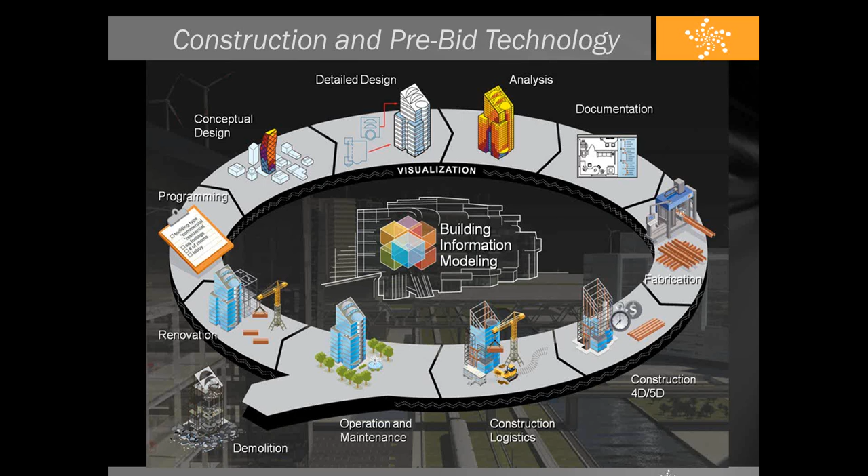Now, one of the things that is key to understand for this is the actual level of detail or level of development. Now, you have AIA E202, which is sort of like the protocol for these levels. So if you ever hear somebody saying, well, we're doing a model and it's 200 level of detail, this is essentially what this means.

Now, this is sort of broad strokes. It's not likely that you're going to have every single thing in an entire model all be the exact same level of detail. So your mechanical systems might be to 300, but the structure might be to 200. And the architecture might vary from 100 to 300 depending on what portions of the building you're working on or what portions of the building are very important or detailed.

And some of this might be informed also with, are you doing renderings and walkthroughs? So you might actually model certain things to a higher level of detail because it needs to look a certain way, not necessarily because of a construction benefit. So you'll be seeing a lot of things like this.

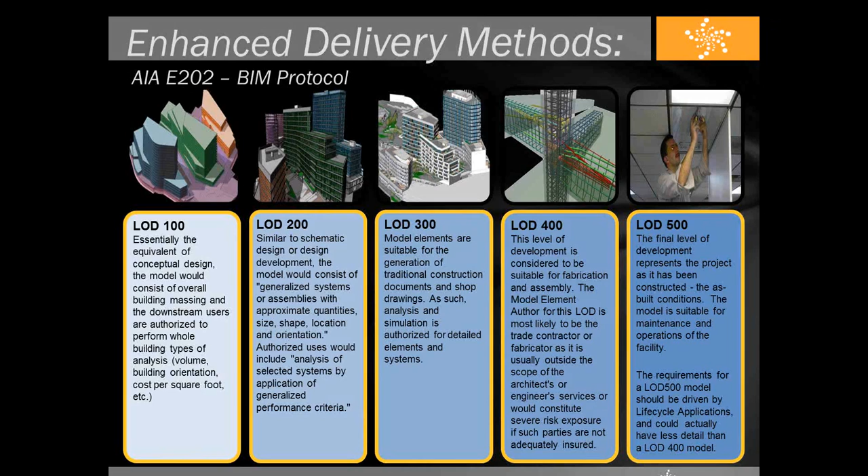Now, in terms of what benefits BIM has for the industry, the main one that everybody seems to be saying is their main benefit that they're getting out of this is visualization. And then below, that's marketing. So the benefit is taking your design and making them real from a standpoint of being able to show your design, whether it's selling a design or explaining it.

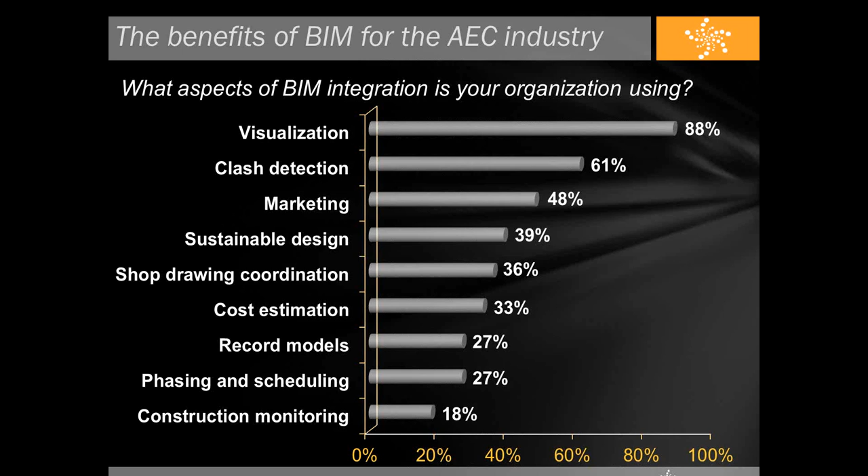Now, the second one down there is clash detection, and that's probably the biggest one from this portion. The problem is, if you look here and down the bottom, you've got construction monitoring, phasing, record models, cost estimating, shop drawing coordination. All of those are not anywhere near as utilized. Now, they're also further down the line. So what we're looking at doing is taking something that is, in all honesty, the biggest return on investment of BIM, but not everybody is actually taking advantage of it.

So the work that we're looking to go over now is focused specifically on that portion: the idea of making it real in the computer before it's real in the real world. If you find a problem in the computer, you can always delete it or move it. If there's a problem in the real world, yeah, maybe you can just fix the problem.

But the problem is maybe you have to order something new. That adds time. By the time the parts come in that you need, the people to install that might not be available. So one little mistake could sideline a whole project. Going through everything in the computer virtually for clash detection, for cost estimating, for actual project sequencing, those things are all very important. Even though they might add a little bit of time to your project or process, that's time and money well spent because it's going to pay dividends down the line.

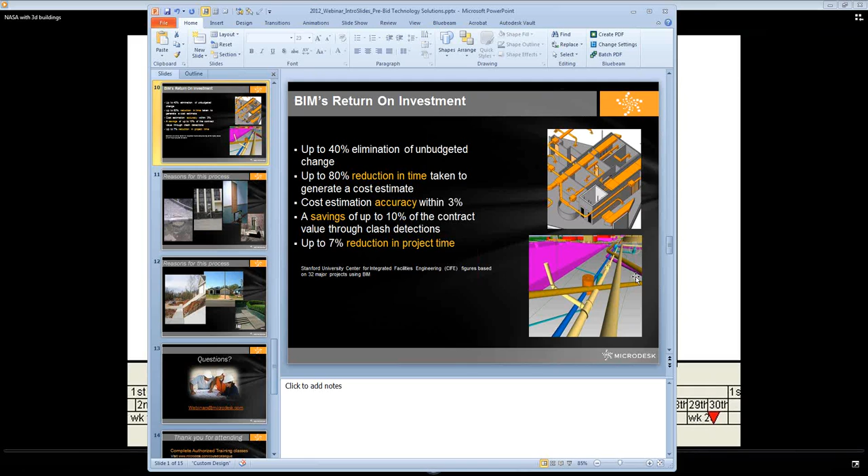Now I'm going to hop out of this and go to the actual software. So right now I'm in Revit 2013. One of the nice benefits of this is that it's Revit, not Revit Architecture, not Revit MEP, not Revit Structure, just Revit. Because I'm on the Building Design Suite, I have the tools for all three.

Some of the benefits of this: if I work for a construction firm, what kind of model can I expect to get from an architect or an engineer? Or can I even expect to get that model? Now if I'm drawing a wall in an architectural project, let's say it's brick on metal stud, I'll just draw this wall there.

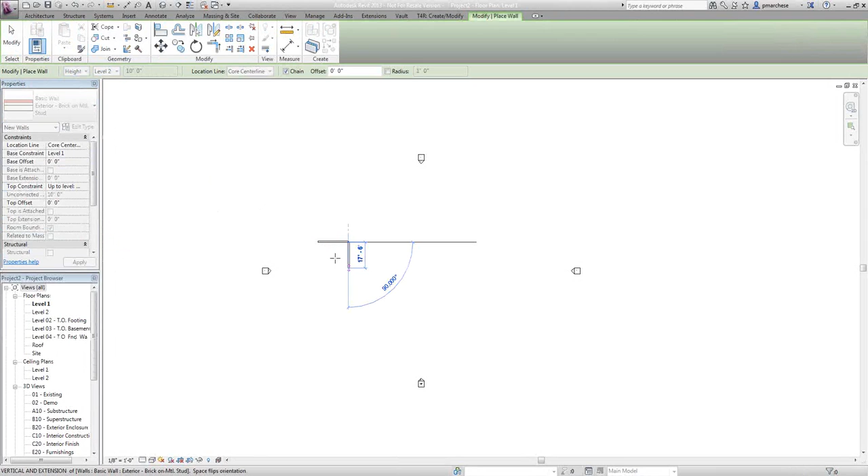Zoom in on it. It's going to look really simple, but I can always change the level of detail and actually see more information. Now, this is fine for construction documentation. The thing is, though, for actual construction sequencing, I might need a lot more information in this. I might need to modify certain things.

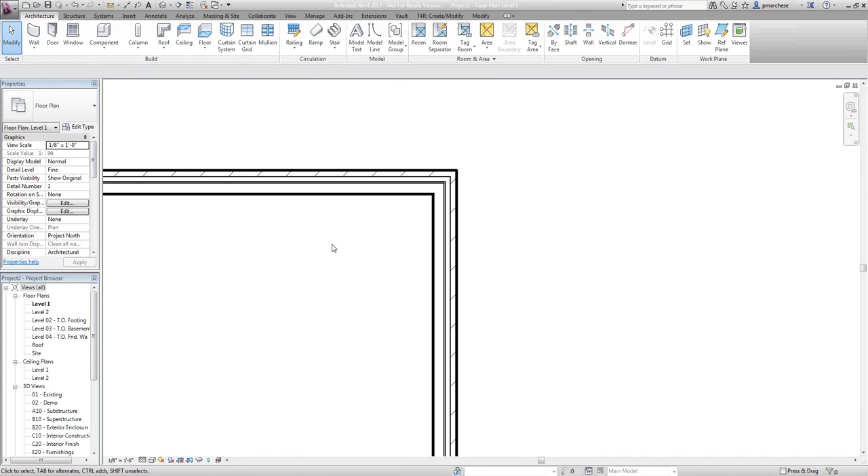There's actually tools built inside of Revit that have been there for a couple of releases now that are geared just towards that. If I click on this wall, what I can actually do is break this up into its component parts, meaning that I can now actually choose these individual pieces. So if I want to modify things here, I can change the actual layers of that wall's construction.

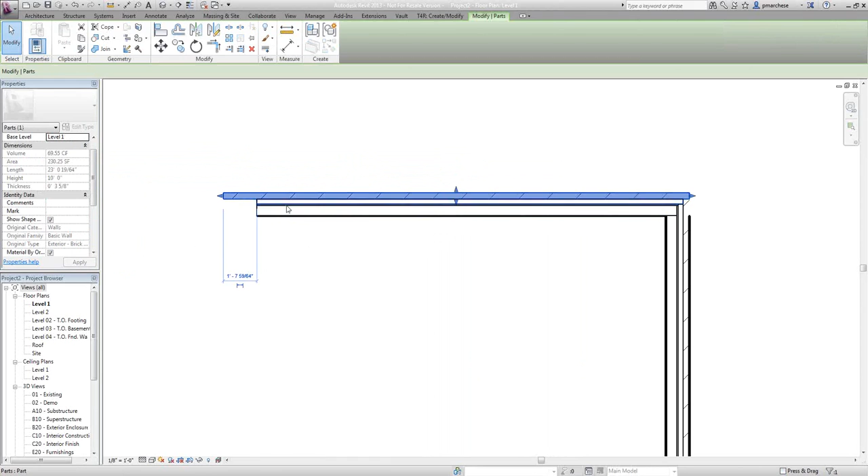I can say I want to phase different parts of this wall. So if I really want to have a full 4D model of every little piece of this, I can come in here and sequence, and say that rather than just being phase created and demoed, I want this to actually just be new and existing.

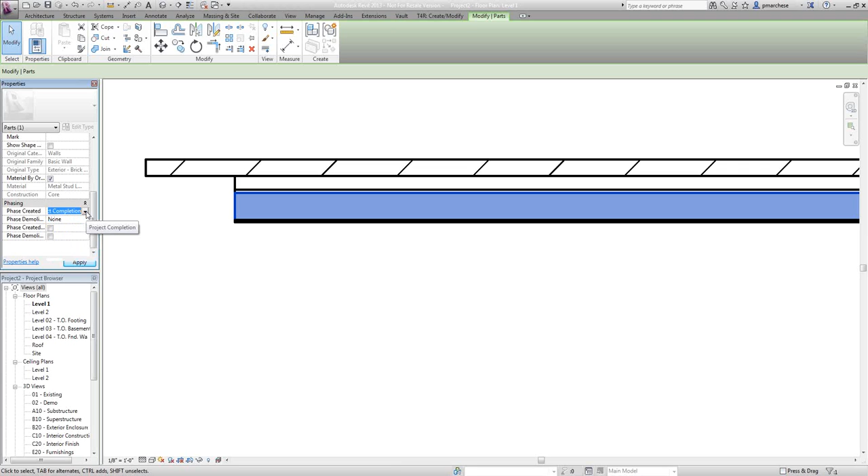I can say, okay, during this phase we're putting up the studs, and then I'm going to come in and put the gyp board up later, sheathing. So I can actually individually pick each layer of that wall to get down to the very details of this. A lot more information that I can modify, and it's still within the native Revit program.

Then I can always pick an existing object and add that data to this. I don't have to start off from scratch having it built that specific way. Another thing, let's say you have a really big floor. So come in here, actually create my floor boundary.

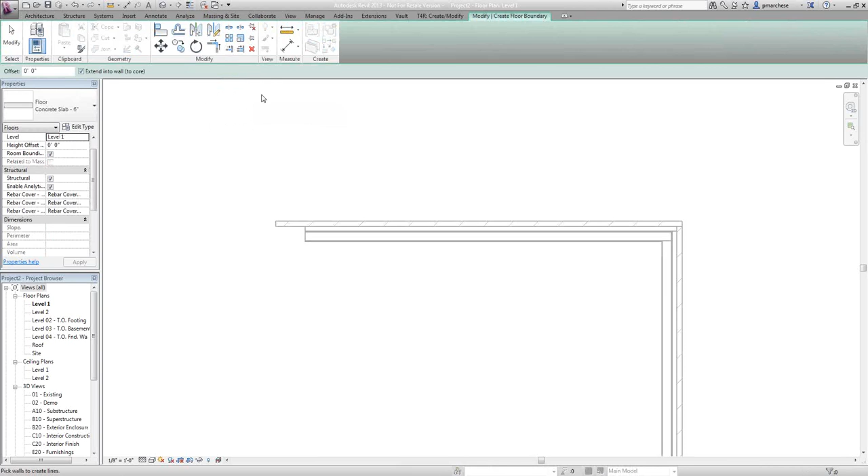Okay, come on. And of course my floor doesn't want to work today. Okay, what I can end up doing with this is actually modifying this to be the kind of floor that I want this to actually be. So I can actually split that object up using the parts command, just like I'd be able to split up this wall.

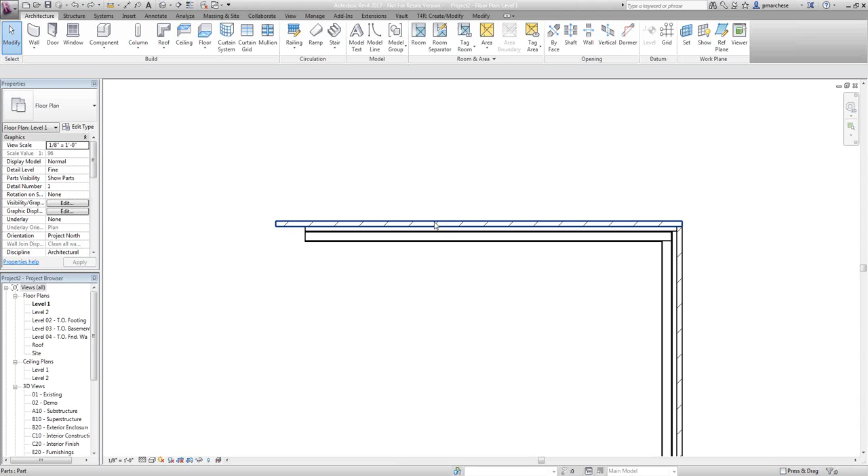So that enables me to take what I might have received from the architect as one huge floor. It's not going to be poured that way. I can actually split that up into the individual pieces so that it'll actually behave and be scheduled or quantified in the way that it actually would be laid out in the field.

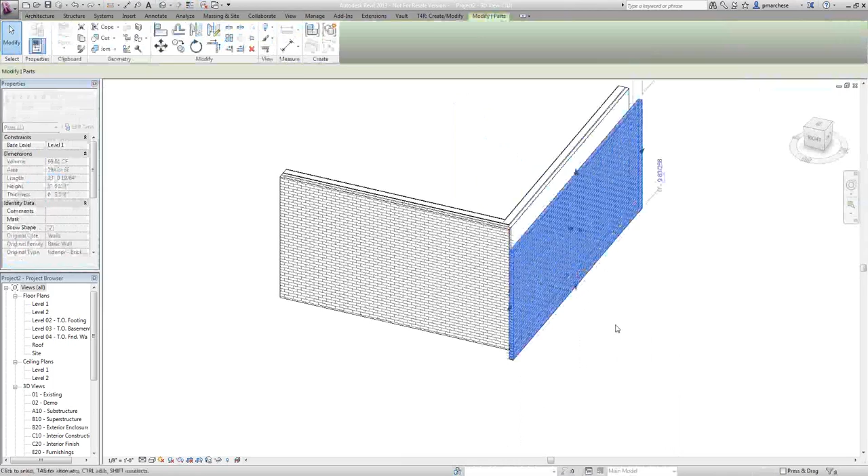So these things that I'm doing here, I actually have that individual control. I can modify these to be what I want them to actually be. I can pick on the different layers, show them as higher or lower. If I need to show a brick shelf but the initial design didn't have it, I can easily just come down there and move the brick shelf down. So I can actually schedule, quantify, and get all the information that I feel I need from my model.

Now for other things, let's say I have a structural column, and I want to say this one is concrete. That's going up.

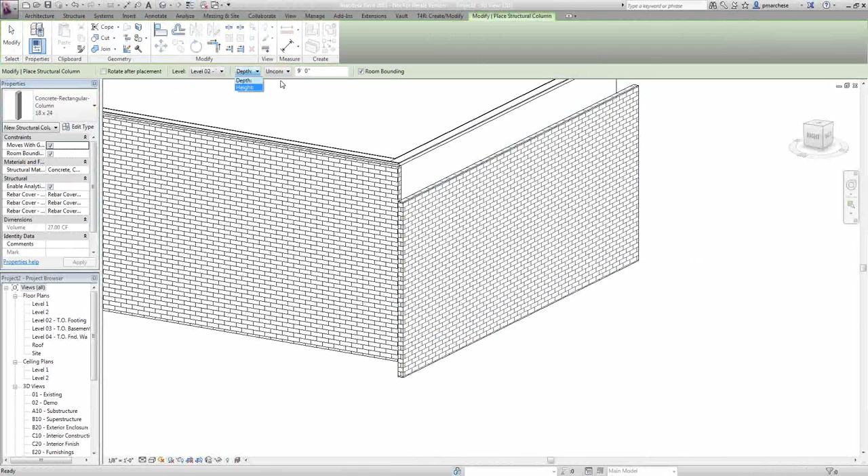Now, normally that might be all you need to do. Just show that column, and you're all set. Start that at 0. There we go.

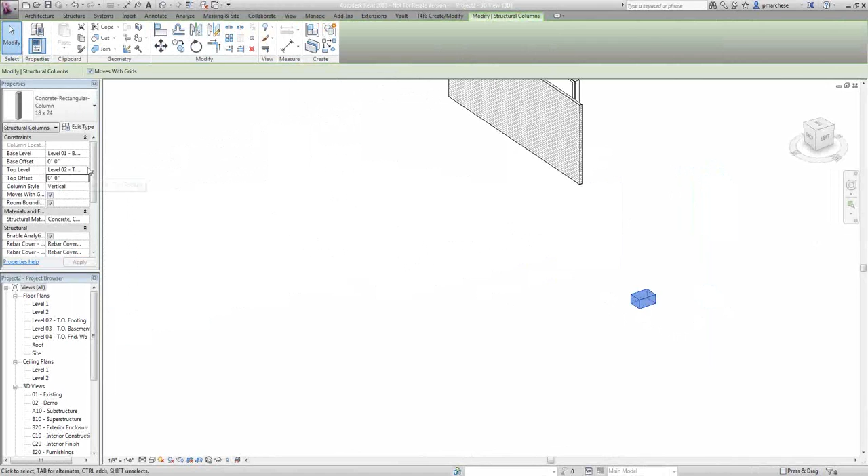Now, what happens if what I really want to do and show here is I'd like to actually see this column with the rebar inside of it. So if I'm running piping through this column, or running things near it, I want to see how much space I have around it.

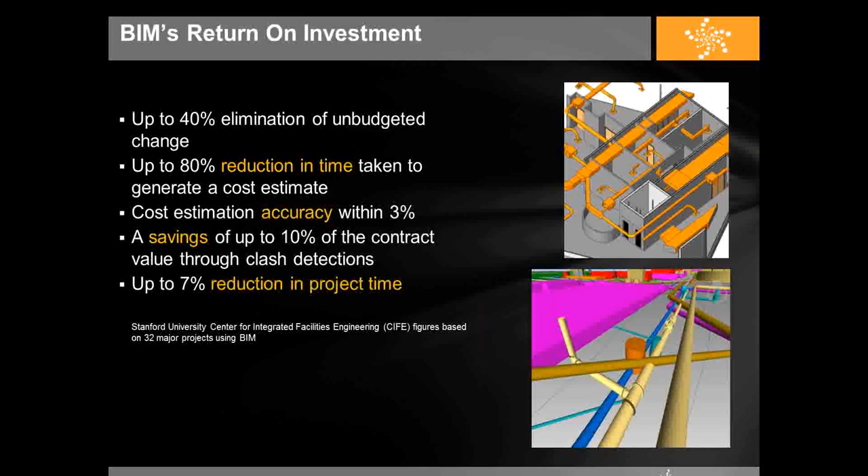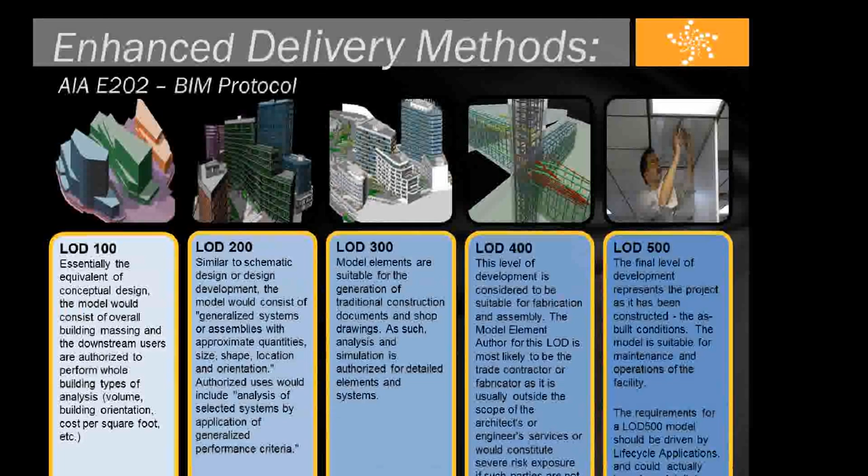So if I have that view from the PowerPoint before, if you have a situation like this where there's a lot of rebar going on, a lot of things happening within a very tight space, maybe they're running conduit through it. Maybe I actually have to figure out how am I going to get all that together.

What I can end up doing is modeling all of that rebar. Maybe not for the entire model, maybe again only for key locations where I have to work.

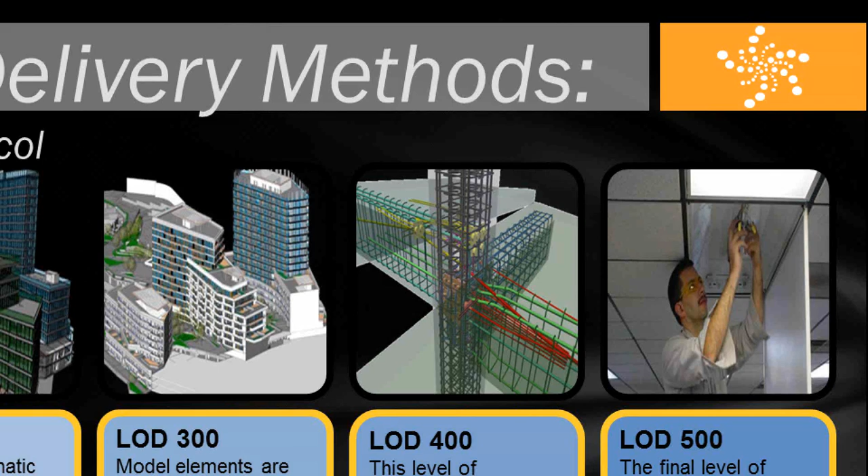And with the tools, it's actually quite easy. I can just select that, tell it that I want to put reinforcing in it. What this will end up doing is it'll give me an actual window with all my connections inside.

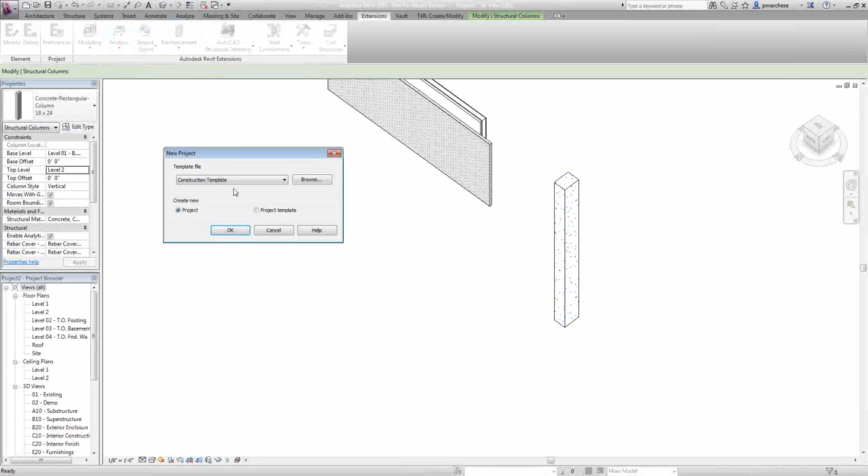So let me do this. Start off with my structural template instead. That'll give me that.

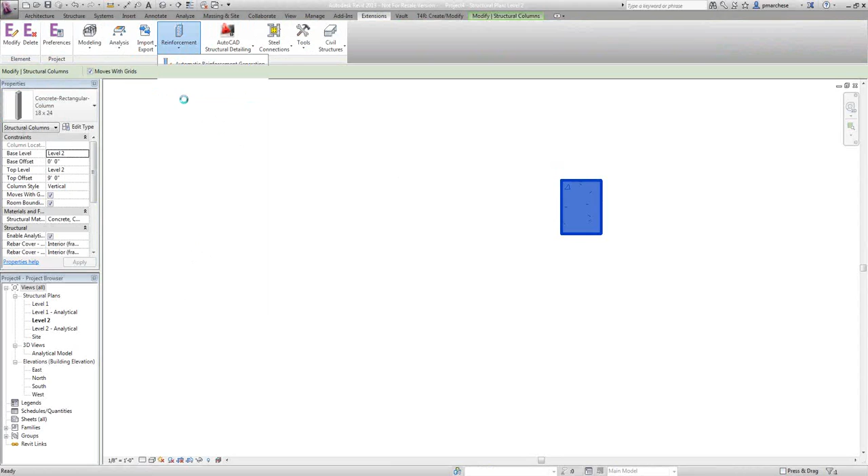So this will give me the tools where I can just select the object, fill in the blanks essentially, and this will actually lay out all of my rebar for me.

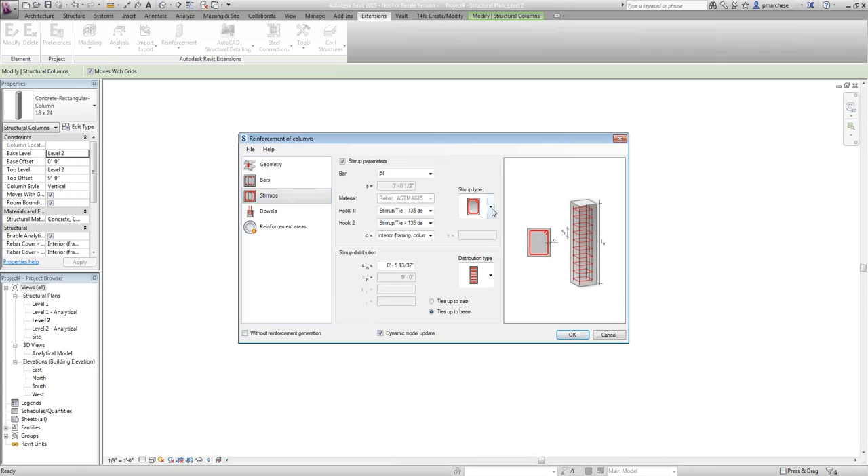So if I understand where my bars need to be, which size they should actually be, do I want to have hooks at the top, what should the stirrups look like, how they're going to be distributed. Maybe I want them to be a little bit heavier on the bottom, and should they maybe have dowels at the top or the bottom? What should this look like?

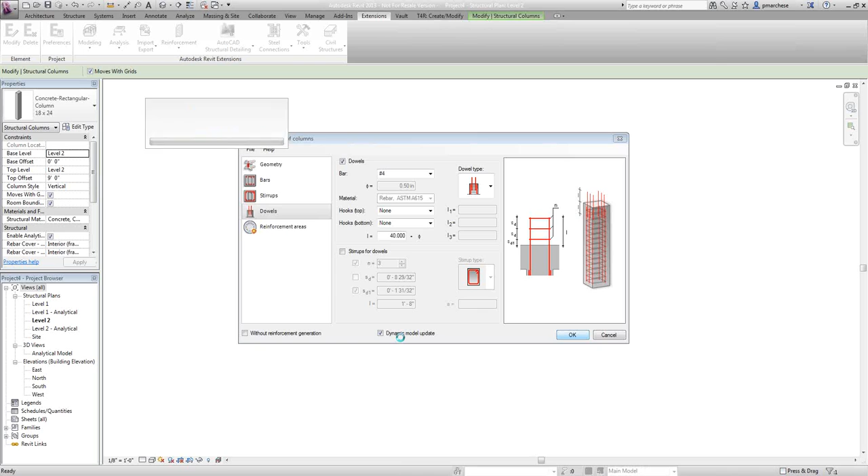So basically I'm just going through there, telling it that I want them, and now in that location, whichever pieces I've selected, I'll actually have all my rebar made. And I can do this for more than just columns at a time. I can actually set things up so this will be automatic for much of my model.

There we go. So you can see my rebar right in there.

Now this is something that I can use inside of Revit, but I can also take this to the next step, which would be Navisworks. So if I needed to do clash detection between multiple models, or to see really how much space I have in here, or if I have multiple models coming together, is there actually enough space for things to fit without causing issues?

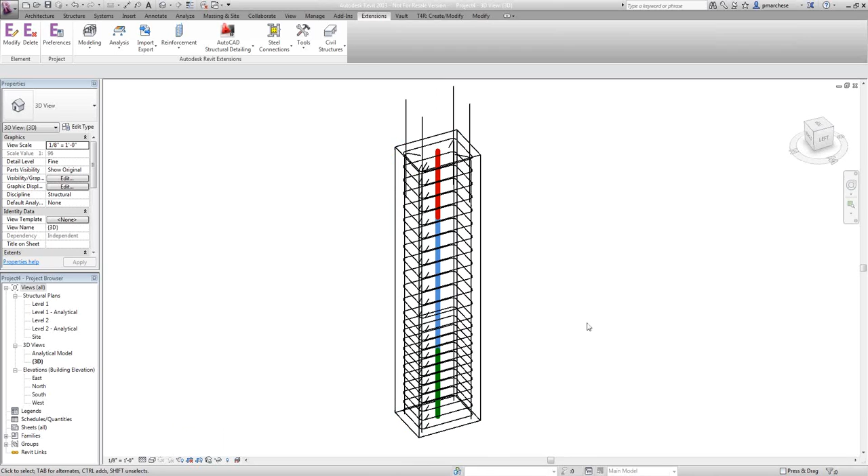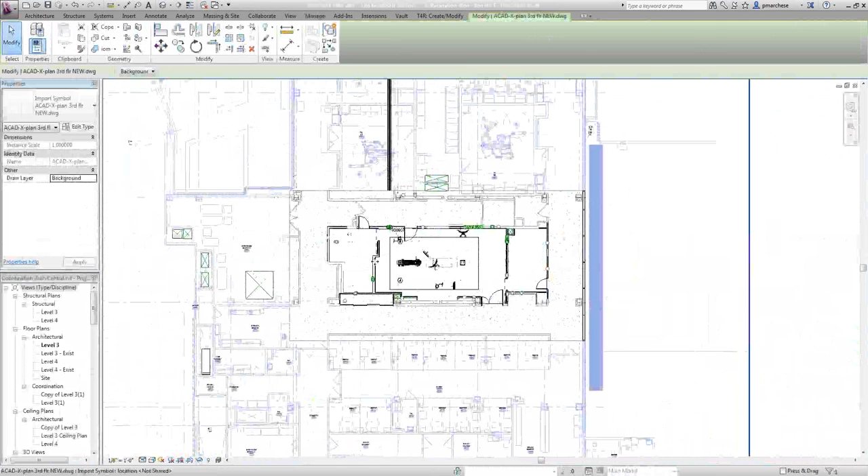Now, this is relatively simple. That wall that I did before, again, still relatively simple. For other projects, when you have a lot of things coming together in a very tight space, maybe you started the project off with nothing more than the big CAD file, but the project is fast-tracked, and you really need to know exactly what's happening. Well, what can be done is only in the specific locations that are important, we can actually run through and modify and model what's needed.

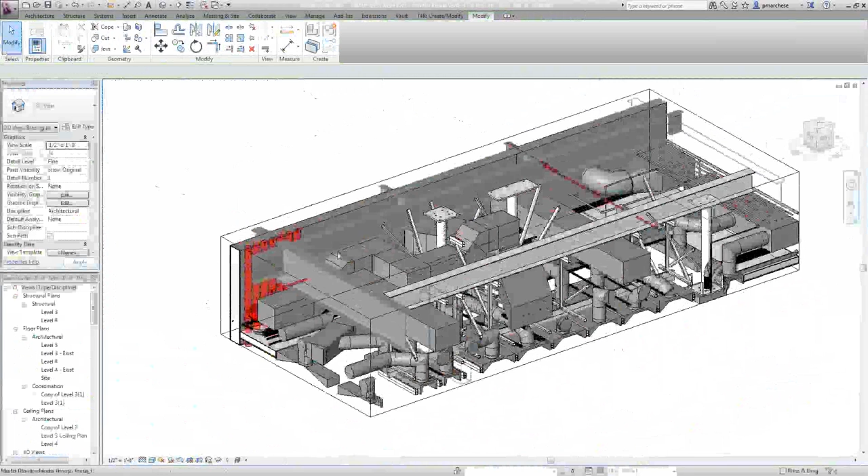So in this case, what we have is an MRI room with just about every single thing modeled at a very high level of detail. Existing content to be demoed, all the actual structural pieces to a much higher level of detail than you would typically see for construction documentation. But in the case of this project, it was very necessary to ensure that every little thing would fit in a very tight space.

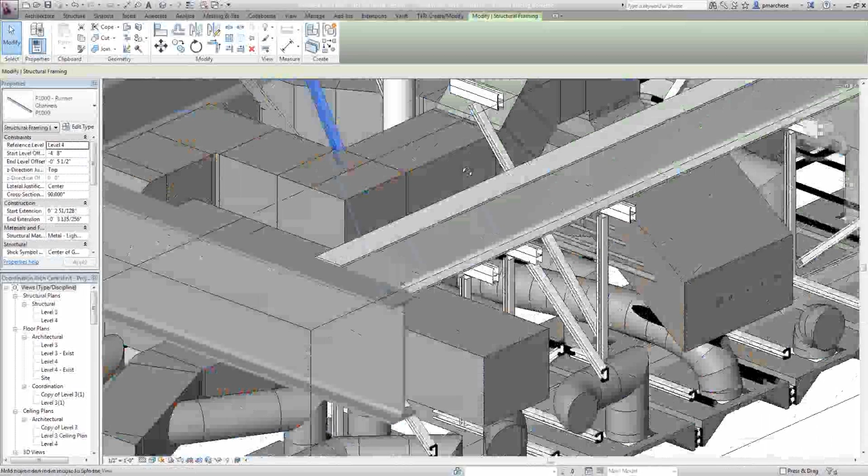So we knew all of the information on what the structure would look like, where it would go. And in some cases, you can see where there are issues with things like piping and conduit going into the ductwork where it had been.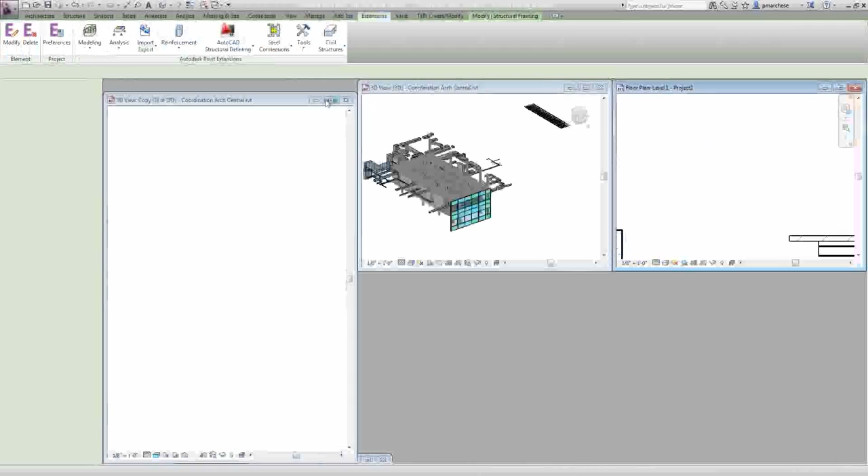But by modeling everything here at a very high level of detail, and being able to see and coordinate things based on the kinds of systems that they are, this can easily be taken to the next level, which would be our clash detection and more of the construction modeling. So in this case, all this information here is going to be readily leaned on and utilized.

So I would take this and bring that to Navisworks. Now, in Navisworks you do not actually model anything. You bring in the models from elsewhere, but they can be from just about any place. It doesn't have to be AutoCAD, Revit, SketchUp. It can be anything. But I can bring this in here.

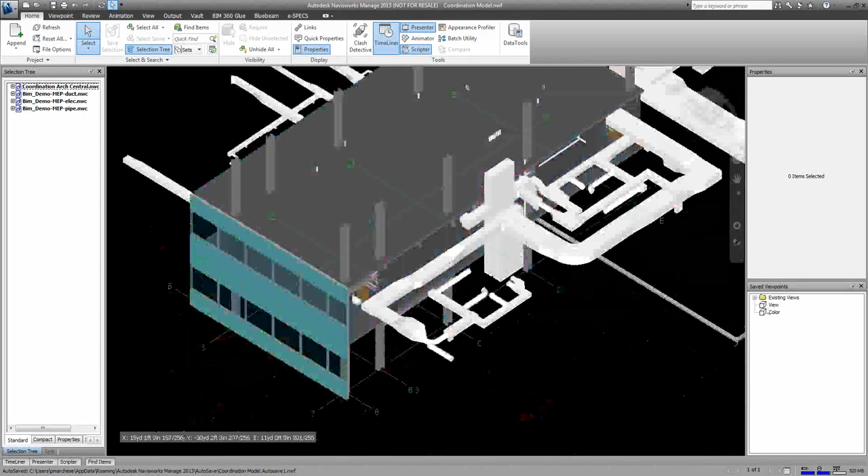And as you can see now in the newer releases, I can actually see my structural grids, so I know where it is that I'm actually looking within the model space. And I can set this up to actually show me all my systems.

So right now I'm actually highlighting my architectural by making that transparent. I'm showing all my ductwork as sort of a cyan. My electric is green, all my conduit there. And then I have all my piping set up as an orange.

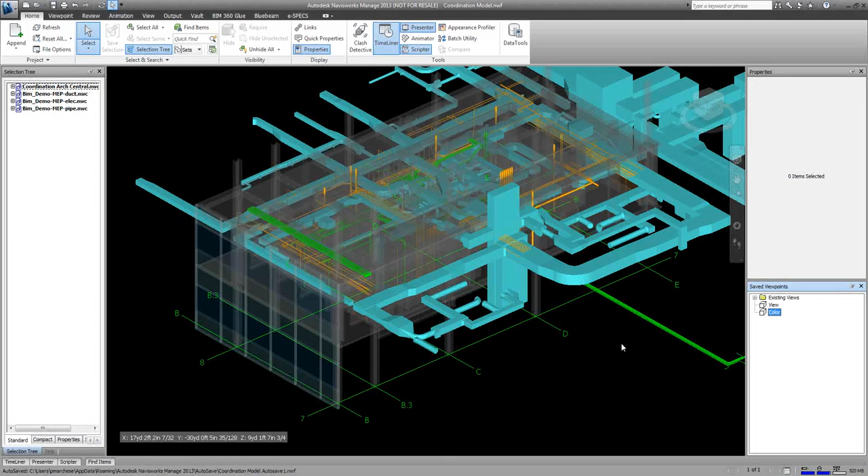Now, at the moment, that's really just showing everything very simplistically. But the benefit of using a BIM tool, not just a solid modeler, but something that has some intelligence to it, is that rather than just grabbing the whole thing and making it certain colors, I can actually set this up to search my model.

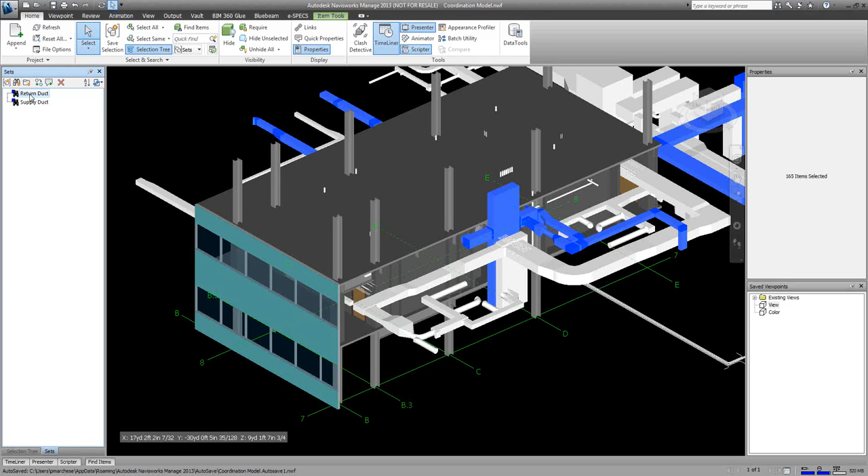So what I just basically did was click on something called a search set in Navisworks. What that allows me to do is go in and tell it, I want you to look through every object in this model and select the objects that have a certain kind of data. In this case, it's grabbing anything that is a mechanical piece that is part of a system called return. Just as if I click on the other one, that grabs all the ones on supply.

So in this case, I can very quickly grab and select just about anything in here with one click. And the benefit of that being a search is that this is probably going to be a live project. As the project goes on, these files that I have here, they're going to be continually updated. It's not like it's a one-shot deal and that's what's going to happen. Especially if you have problems that you find, you'll want to fix them.

I can bring those back in after taking adjustments, and this will automatically go and get all of the current things that match that content. It's not looking at what I used to select. It's looking at what still matches that information, that data.

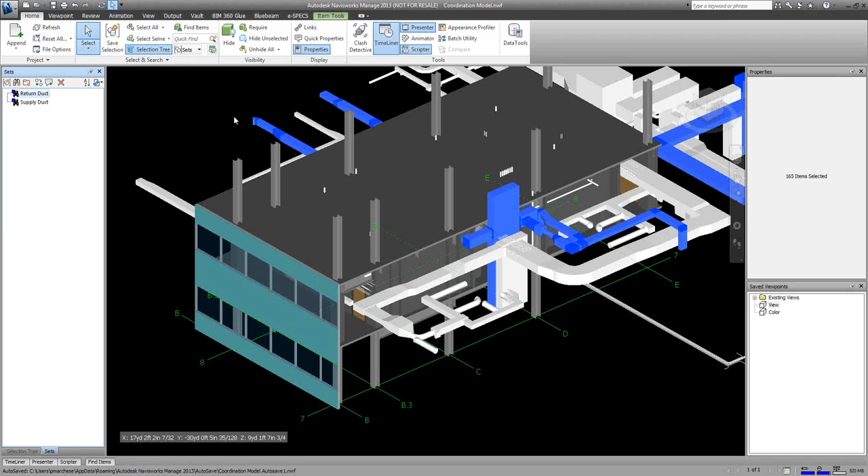Now, that kind of data is very useful inside of Navisworks because the main thing that most people utilize, again, if we look back at that little survey, is going to be the clash. There we go. Now, in this case, I just did a really quick one that was looking at all my ductwork versus all my electric, so all the conduit that I have in there. And this turns up 67 clashes.

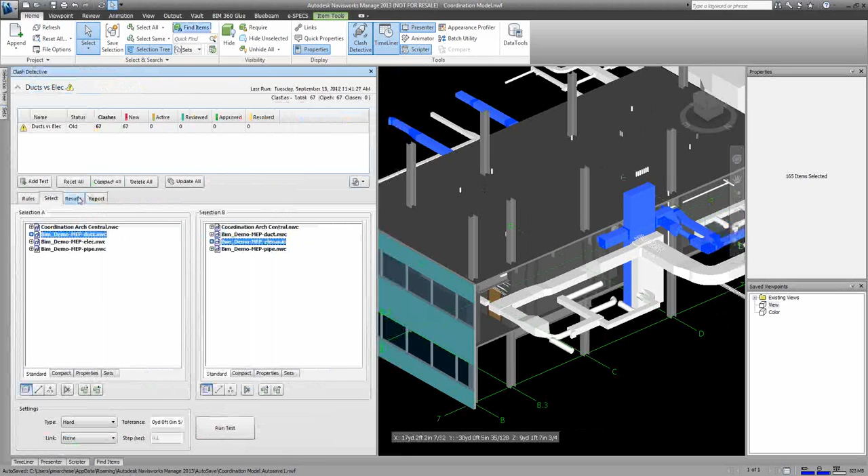So from there, I can look at my results, and I can actually click on these, and it'll show me all the issues that I have and where they all occur. Some of these clashes might be consistent with several different things, so I might have one pipe that hits 10 or 12 objects. I can tell this to sort them by their proximity to certain things.

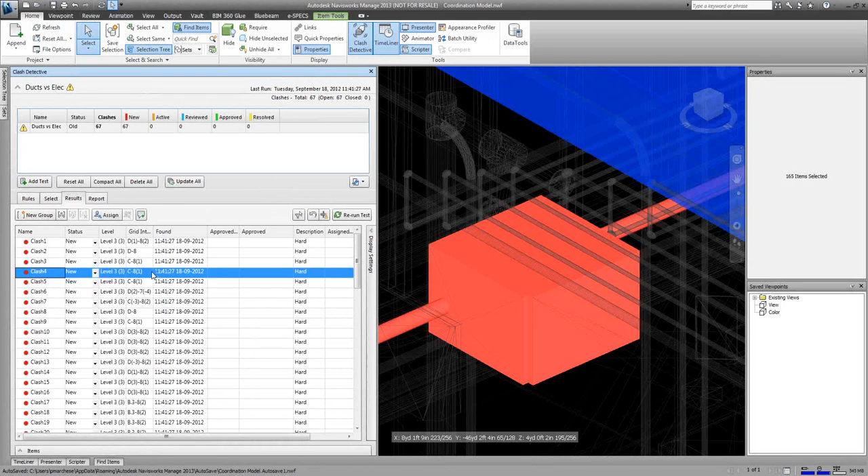But I can also start assigning these. What that means is that if I'm using this from a standpoint of project management, I can say, okay, there's a problem here, it's a couple of feet off of the C8 grid line, and you are going to deal with it. So I can start to give this out and actually tell whose responsibility it is to fix this. I can keep track of the status of this, and these can automatically be listed as resolved when I rerun this and it finds out that that clash no longer is occurring.

I can modify what kind of a clash this is, whether it's a hard clash, where it has to physically interact, or soft, where I'm giving it a little bit of clearance. So I can start to modify a lot of things inside of this. And it really just depends on how I want to manage this. What data do I actually want to see? There's a lot of things here that I can actually look at.

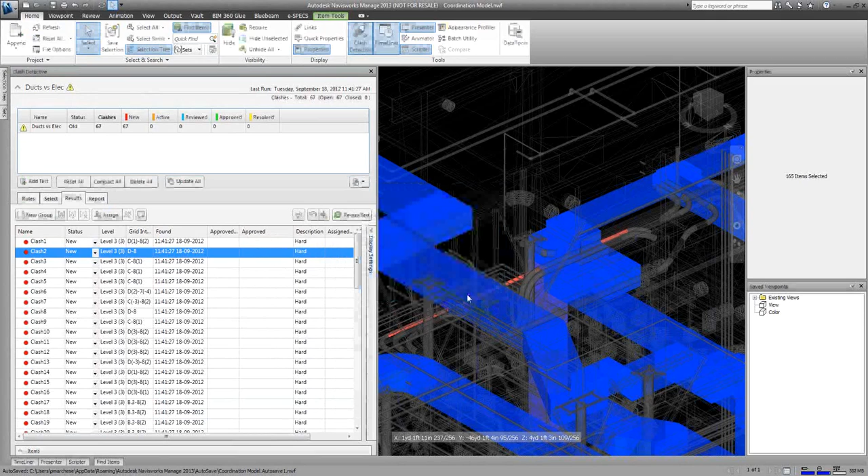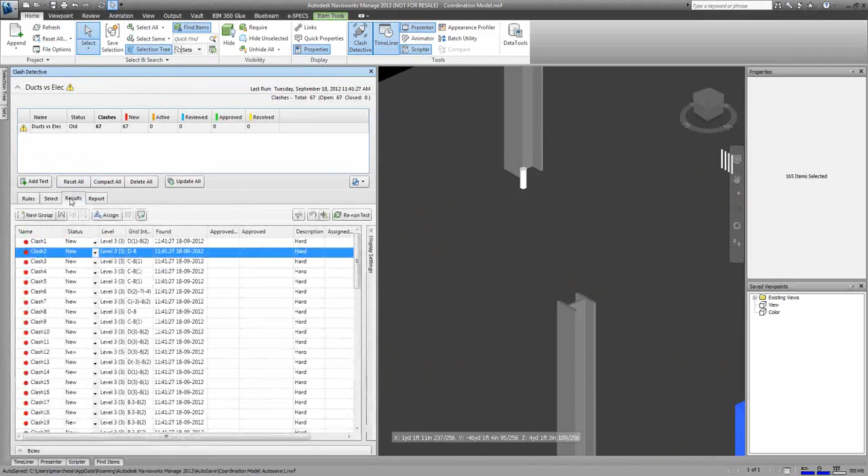Now, if what I'm doing is I'm running this clash and I'm going to be sending this to someone else, I'm not actually looking at it with somebody next to me, I can always create a report, save this out, and then send it to somebody else. And any of the settings that I've made in here or any customizations I've done, I can always save that right up top. So when I decide I want to do another one, I'll say add a test.

And this one's looking at ductwork versus pipe. So I actually have two different clashes that I can keep going back and forth between. It remembers the settings, it remembers the results, and I can actually track how many clashes I have.

If after the first project status meeting we have, we run through and we take care of about 30 of these, I'll still see I have 37 that are active. I reviewed and approved or resolved however many else that are still floating around, and this becomes part of the project record. It'll remember when I found this, and then it'll also remember when it was fixed.

Again, this is one of the typical ones. And if it's something that you run all the time, or you need to give the data to somebody else, I can export this and share that with others.

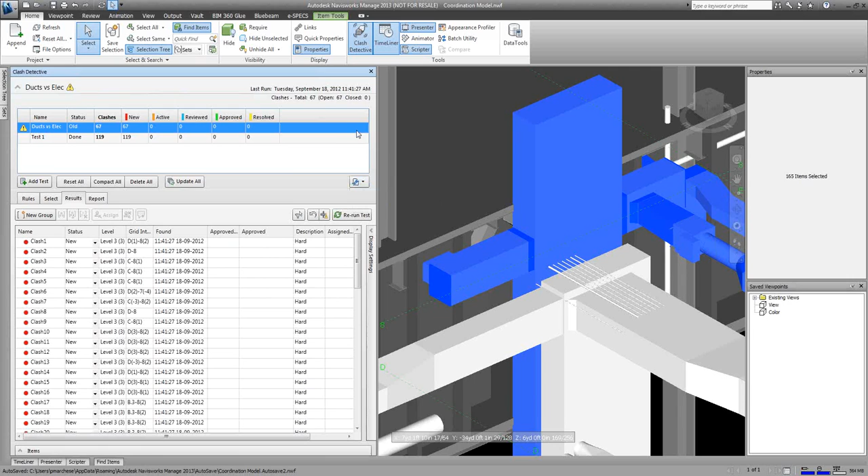Now, branching off of this, right now I'm in Navisworks, and I'm doing my clash test. I'm looking at all these different models that I'm coming together. But Navisworks is a program that has to run on a computer. That might seem kind of dumb to say, but what I mean is it needs to run where you physically are, on an actual computer. You're not going to be running it on your iPad or anything like that.

There's a program called BIM 360 Glue. If you remember a program that used to be called Horizontal Glue, Autodesk purchased it. This allows me to take what I have and actually upload that to the cloud. So at that point, anyone with a web browser can actually log on and review this model with me. They can actually do clashes in the cloud as well.

So I'm not just limited to having to have a good laptop or desktop to run this now. If someone's out in the field with a little beat-up old laptop, they can connect to the internet, they've got a web browser, and they can actually see this information and review it on site. So if you've got subs in a trailer and you're trying to show them what's going on in 3D to make everybody really understand what's happening, they probably don't have a computer that can run a full project Revit model on. Not a problem. The Navisworks files are coordinated and consolidated, but also very light. So I can actually look through this when I'm trying to work through problems on the site.

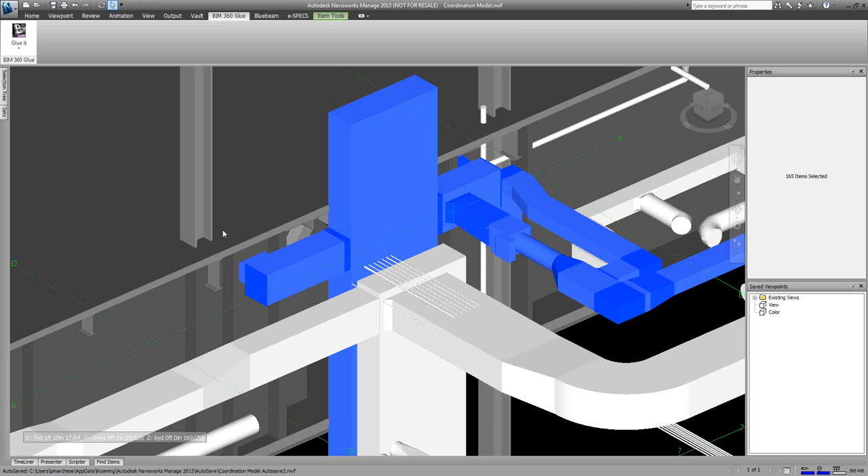Now, everything I've gone through so far has been focused mostly on actually putting together the model and then looking at problems. How do I deal with and fix those problems? One of the other features we're looking at is Timeliner.

What this essentially does is take my model and start showing it in a 4D simulation, essentially meaning that I get to watch or show my model being put together throughout the project timeline. Not necessarily from, this is the old and then the new, but actually in a week-to-week following the project schedule.

This allows me to pull in timelines from places like Microsoft Project, Primavera, and also a CSV file. So if you just like to use Excel and you've got everything laid out in there, not a problem. Bring it in, use it, and that'll actually set things up.

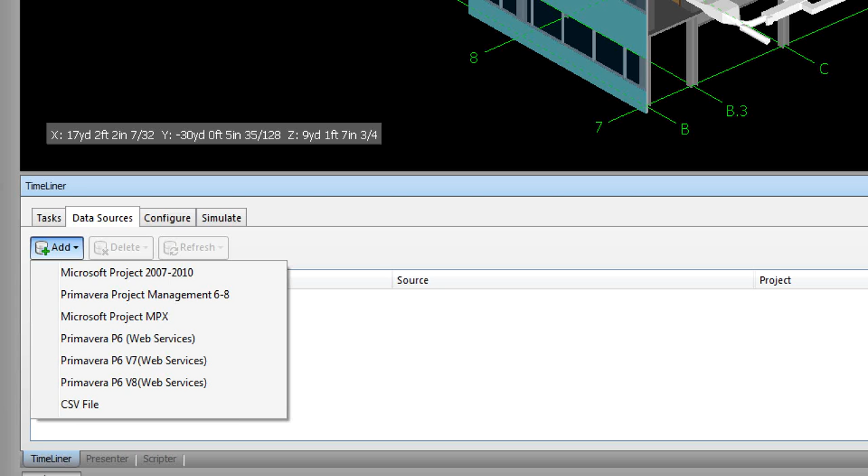If I don't actually have anything like that, I can still add my tasks manually, and I can also say I want to add certain tasks automatically for every layer, every set. So that can actually run through and grab half my model right there.

So what this allows me to do is actually show my project being put together piecemeal, one step at a time. So if I want to actually look at the sequencing and make sure that, okay, so you're saying at this point we're going to be bringing in the crane, and then when you start to look at the animation, you realize, well, where are we going to put the crane because we still have all this material there.

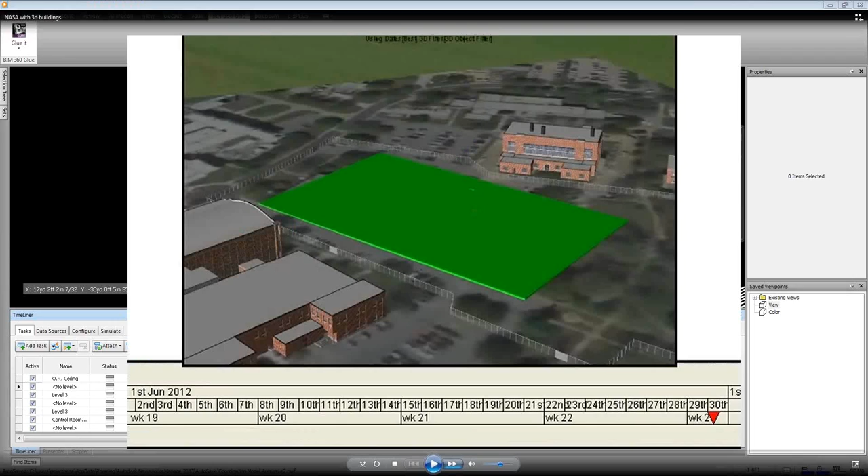So you can utilize this not just from a clashing standpoint of, is this beam going to hit that duct, which you can also do as well. But you can also use this as a sequencing tool for where things are on your site. As an example, this is actually a real project. You can see the timeline going by on the bottom.

So what's happening is it's actually going through. You saw first they were putting in the footings, and they poured the actual slab. Now they're going in and showing you in green what's happening at that point in time. Once it's finished, then it becomes a solid color.

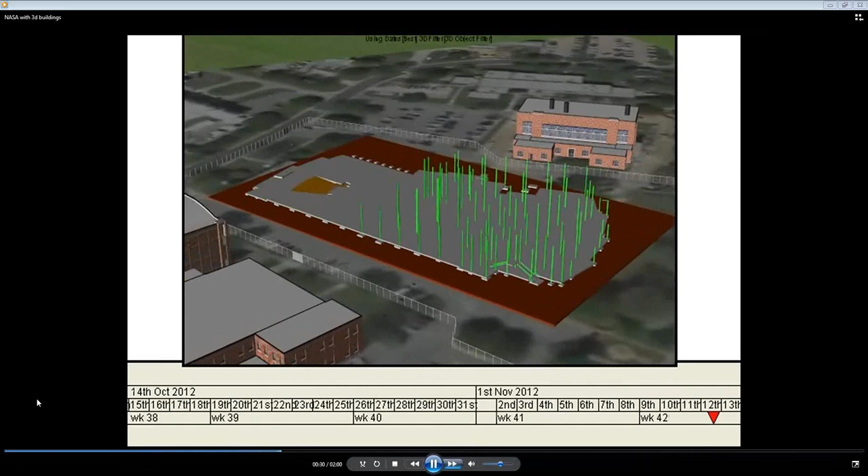So this is moving a little fast just because I didn't think you wanted to sit here for 2 minutes and watch it at normal speed. But essentially, this is used on site to keep track of where things should or should not be.

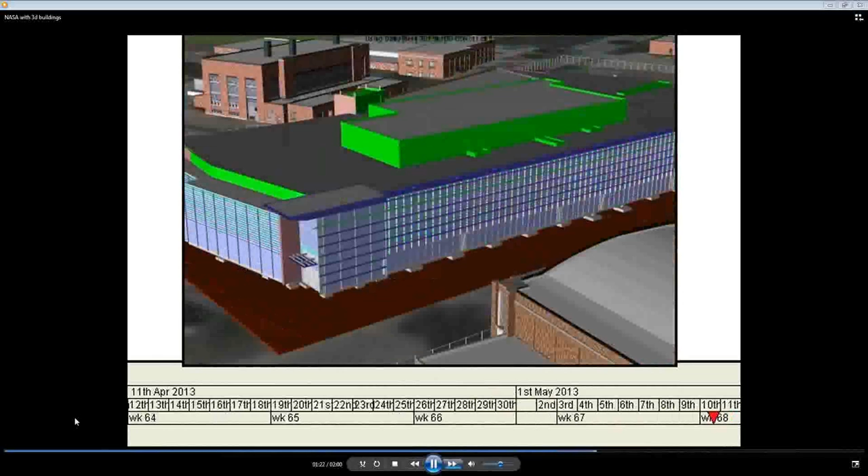Within Navisworks, I can tell it that I want to see the actual timeline versus the planned. So if things are taking longer or are actually ahead of schedule, I can see how things are doing based on that. There's a lot of little things I can do within this. I can modify my schedule, I can manage that schedule, and I can set things up how I need. So you can see here I've got my little timeline that this did automatically.

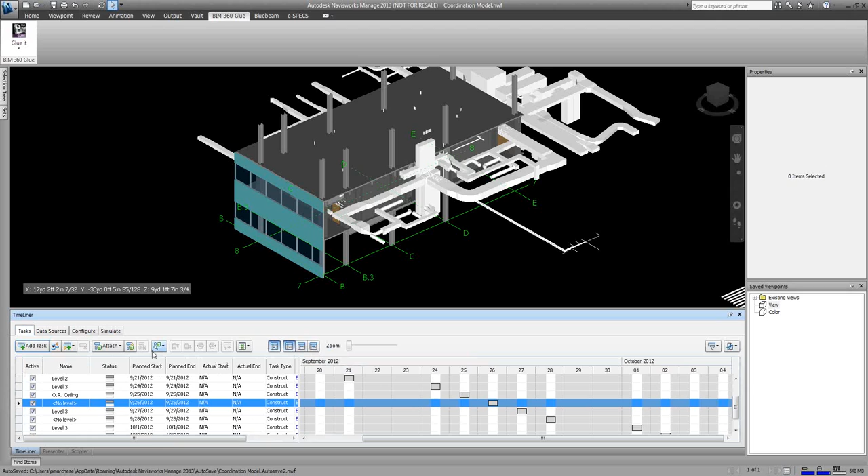And then I can modify my settings to configure this to look specifically early or late, just beginning and ending. I can set all this stuff up, and then it just builds based on what it sees and what I've told it to do. And if I need to change my timing, I only want to focus on a certain portion. If there's certain text I want to overlay on this for my client or presentation, again, it's all editable. This is information I can customize to meet my needs.

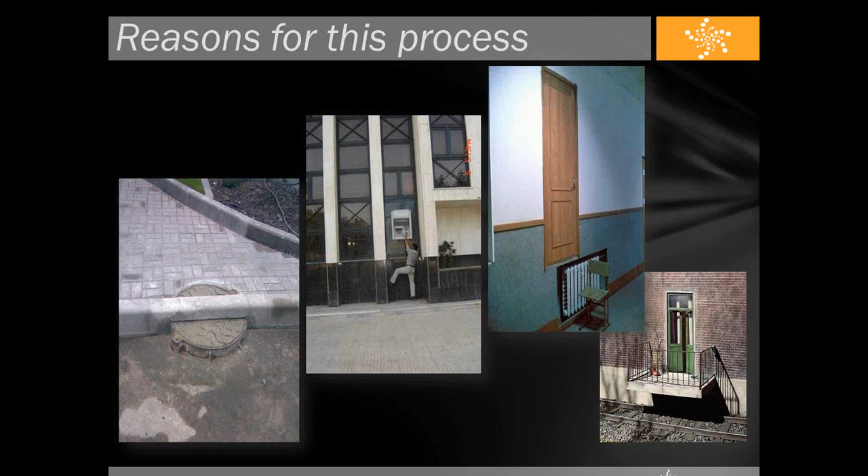So let me hop back in here for a second. Now, a couple of reasons why we do this. Hopefully this stuff has never happened on any of your projects, but more than likely you've seen things like this out in the real world, things that could have easily been dealt with if there was better communication or coordination. Just a couple of clash detections between a few things, you probably wouldn't have to worry about that, or just seeing that something's wrong in the field and making sure you mention it. But as long as things are being built where the documents say they should be, and that's what caused these problems, these things should have been picked up before it ever got there. By doing certain kinds of reviews via the web with certain tools, or live, these kinds of things can be avoided.

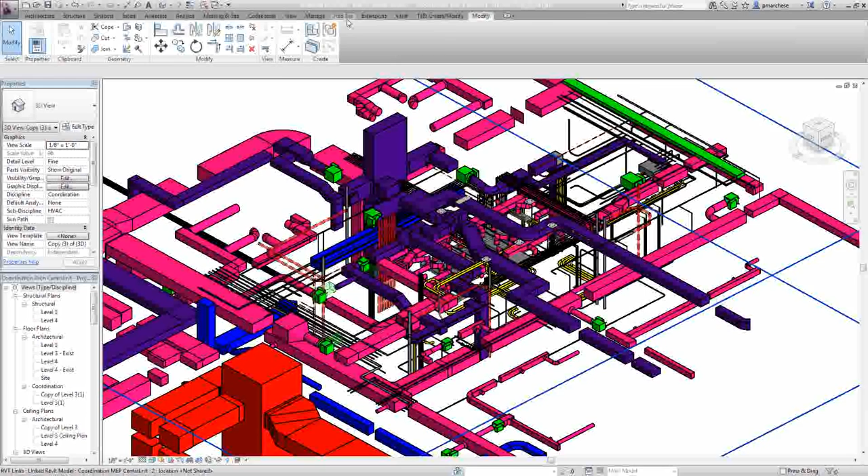And just to clarify, the question said it allows you to view Navisworks files from another computer. In actuality, it doesn't have to be Navis. If I look over here on Revit, you'll notice I have a glue button there as well. So essentially I could upload from Revit, I can upload from AutoCAD, I can upload from Navisworks. So it's a cloud-based service that allows you to review and coordinate with that tool. And that'll actually be a subject on one of our future webinars as well.